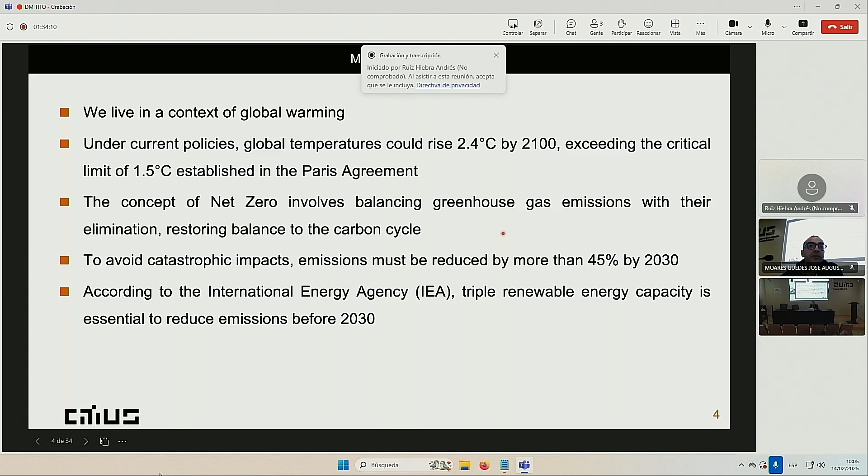So, to mitigate this, the concept of net zero appears, which involves balancing greenhouse gas emissions with their elimination, restoring balance to the carbon cycle. To avoid catastrophic impacts, emissions must be reduced by more than 45% by 2030. And according to the International Energy Agency, tripling renewable energy capacity is essential to reduce emissions before 2030.

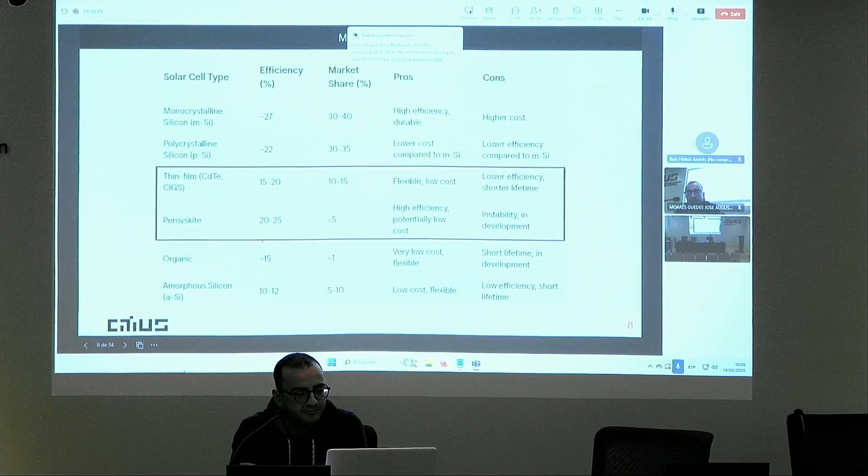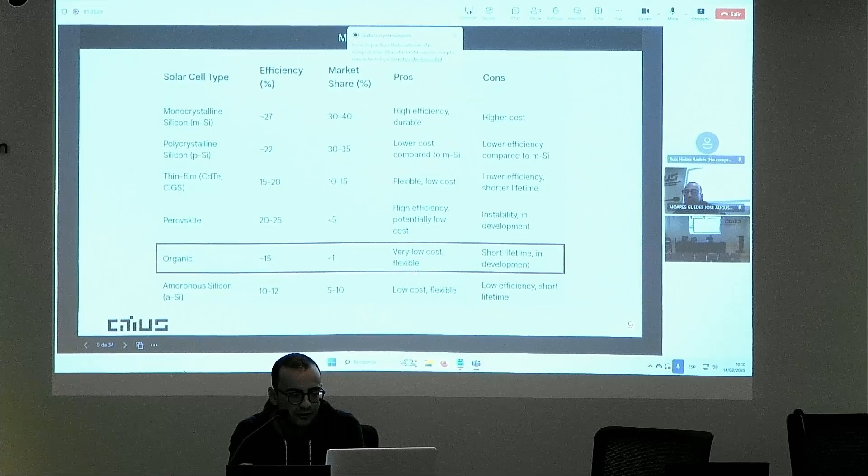However, in this work, we focus on the organic solar cells, which have efficiencies around 15%, which is very low. They have very low cost, and they are flexible.

But why organic cells instead of the other types of cells?

When we compare the organic solar cells with silicon cells, these are presented as a cheap option. They are light and flexible. They are easy to manufacture. There are abundant raw materials, and they are environmentally friendly. In fact, the organic solar cells have the lowest carbon footprint among all.

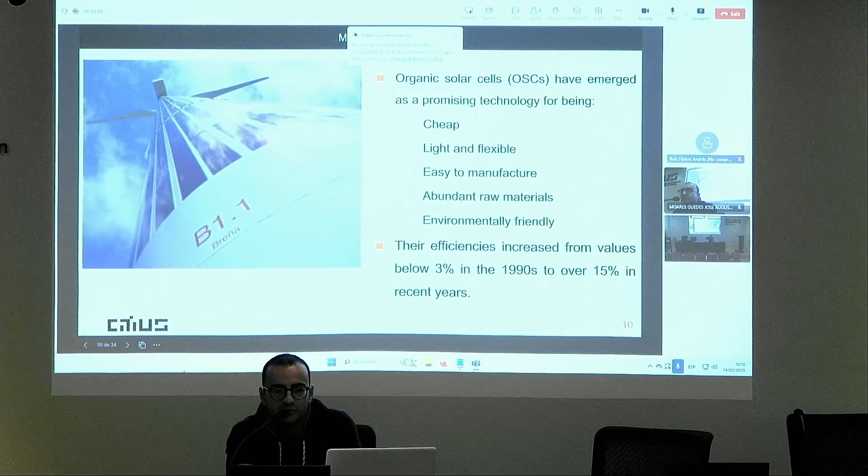Also, their efficiency is increasing, from values below 3% in the 1990s to over 15% in recent years, and rapid improvements suggest that the efficiency is going to keep increasing.

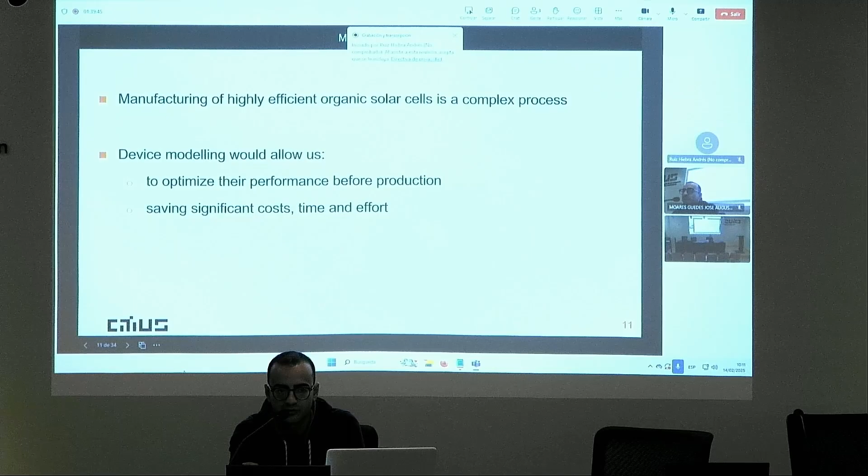When we compare, the manufacture of highly efficient organic solar cells is a complex process. So device modeling will allow us to optimize their performance before production, saving significant cost, time, and effort, which is so important for the industry.

Therefore, in this work, we focus on understanding how an organic and polymeric solar cell works, modeling and characterizing two experimental organic solar cells, and then optimizing the organic solar cell performance to maximize the electrical energy generation.

Let's start with the solar cell fundamentals.

First of all, for a solar cell to work, we need light. The AM1.5G spectrum shown here is the standard for measuring cell efficiency.

Another fundamental concept is the energy band gap, which is the minimum energy to overcome to create the charge carriers, with its relationship to wavelength. For example, if we have a material with an energy band gap of 1.37 electron volts, it means that with wavelengths shorter than around 900 nanometers, we can absorb all these photons and create carriers.

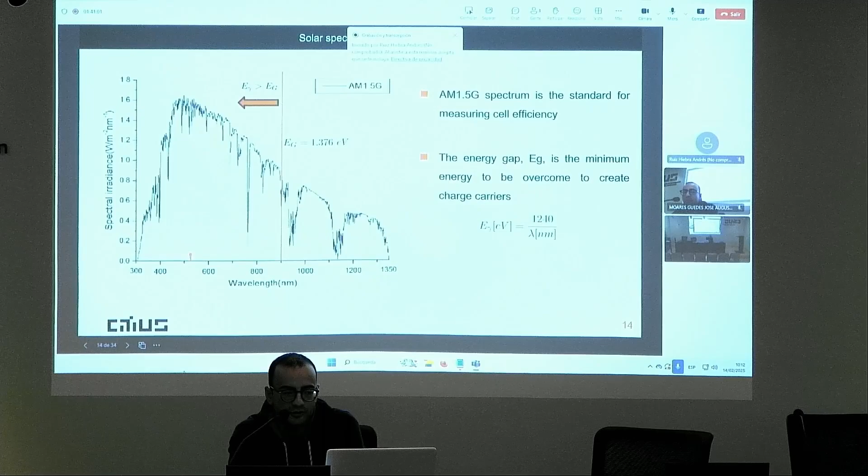After that, the electron must travel to one contact and the hole to the other contact. So the number of carriers created due to the absorption of photons is called the generation rate, and the opposite process is recombination, giving up energy.

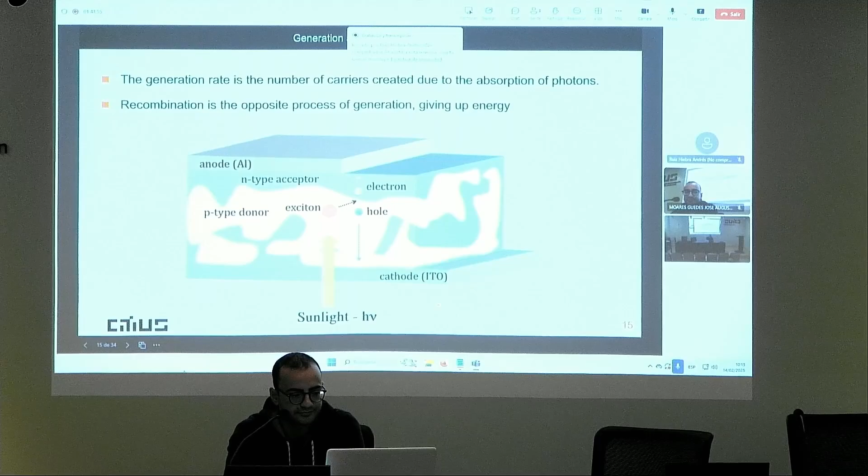Here I present the main figures of merit that we use to characterize the solar cells. Here you can see the current versus voltage curve, called the IV curve, in red. From this curve, we can extract the short circuit current, which is the current at 0 voltage, and the open circuit voltage, which is the voltage at 0 current.

Also, from the power-voltage curve, called the PV curve, here in blue, we can extract the maximum power, and with this point we can extract the voltage and current at this point. With these variables, we can calculate FF, which means fill factor, represented here.

The fill factor graphically is a measure of the squareness of the solar cell. The more square, the better the cell. With all of this data, knowing this and knowing the input power, we can calculate the efficiency of the solar cell.

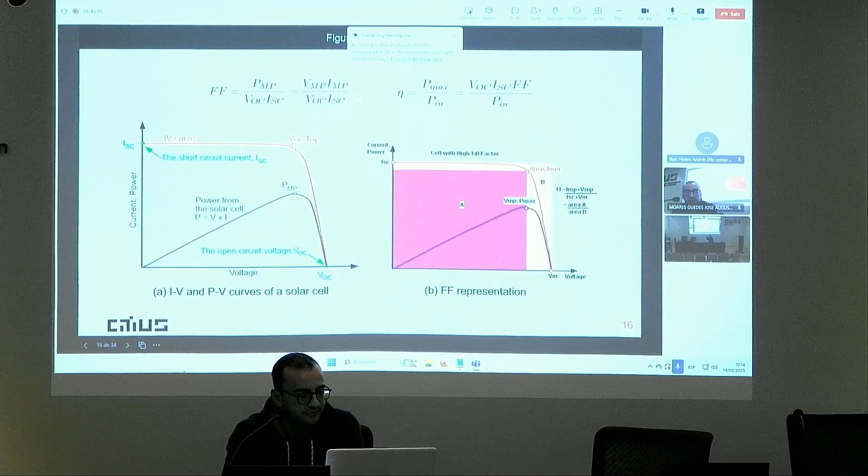Let's move on to the modeling of the experimental organic solar cells.

Among all the types of organic solar cells, we will highlight the bulk heterojunction ones, represented here as an example. These cells are formed by a mixture of two semiconductor polymers.

Here you can see the main structure: first, one transparent electrode made generally from ITO. Then we have the hole transport layer and the electron transport layer, which facilitate the transport of holes and electrons, respectively. Here is the active layer, formed by two semiconductor polymers, and finally the metal contact with a low work function.

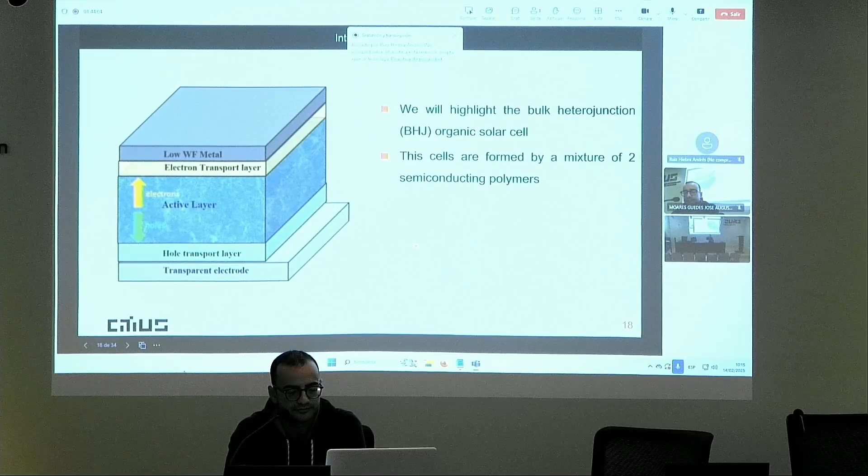This figure illustrates the structure of the experimental organic solar cells fabricated by researchers at Rovira i Virgili University in Tarragona.

Here I present the thickness of each layer. Note that all of them are in the nanometric scale. For example, in the silicon ones, the scale of each layer is around microns.

The structure follows as you can see here. First, the transparent electrode made by ITO. Then we have the PEDOT:PSS and the PDINO acting as the transport layers of holes and electrons, respectively. Here is the metal contact made by silver, and these are the active layers: the first semiconductor as a donor and the second one as an acceptor.

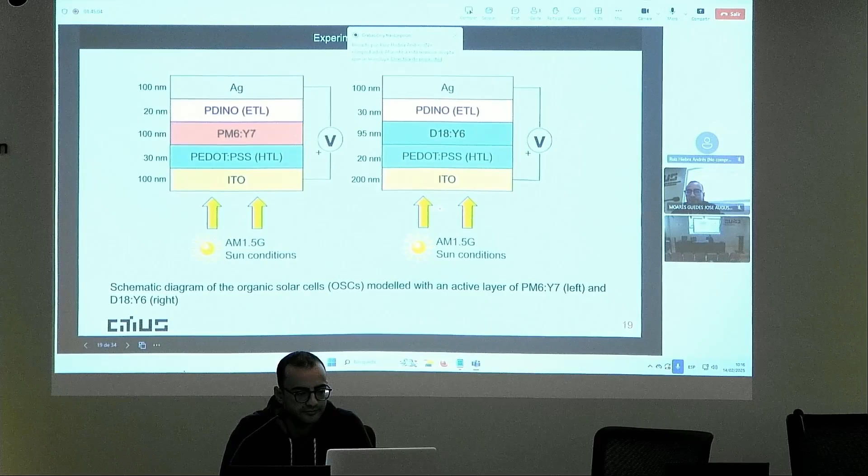In this table, I summarize the key experimental parameters for each organic solar cell. The fixed values in this table are directly taken from experimental works, and the parameters expressed as ranges are not explicitly reported and require fine-tuning.

Here you can see the active layer thicknesses, the work functions of ITO and silver, and the transport layers, the affinity, the relative permittivity, the band gap energy, the lifetimes of electrons and holes respectively, and the mobilities of electrons and holes respectively.

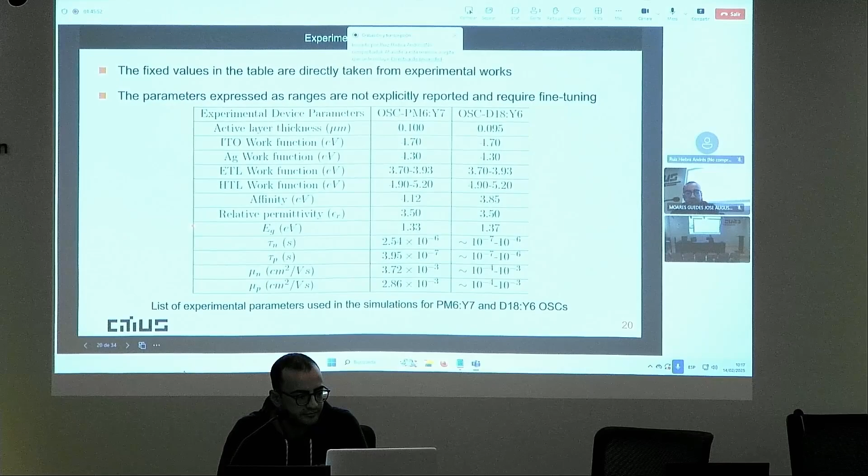To evaluate the photovoltaic performance of the devices, the current density curves were simulated at room temperature. We sweep the voltage from -1 to 1 volt. We simulate at dark conditions, meaning without illumination, and under the AM 1.5G solar spectrum, with light intensity of 100 milliwatts per square centimeter.

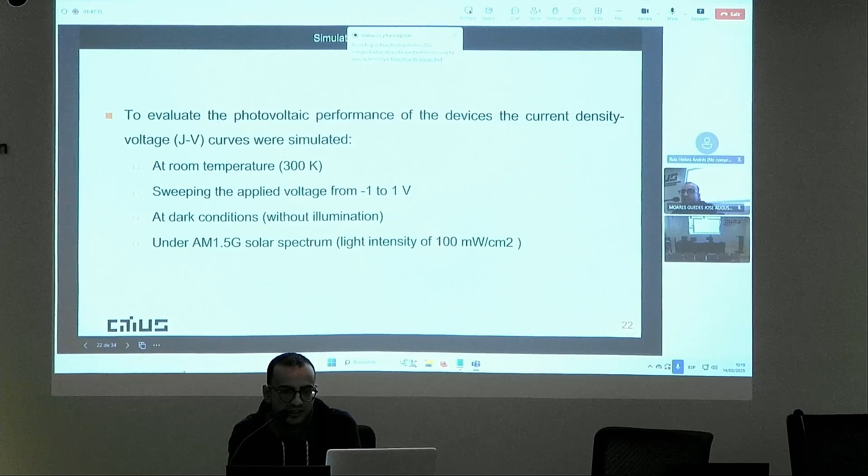Now let's see the results. This figure shows a comparison between the experimental and the calibrated curves of the PM6 organic solar cell under both illuminated and dark conditions. Note that the simulated curves perfectly match the experimental ones, validating the accuracy of our modeling.

Similarly, in this case, from the D18 organic solar cell, we have the same behavior. Both calibrated and experimental curves perfectly match, validating the accuracy of our modeling.

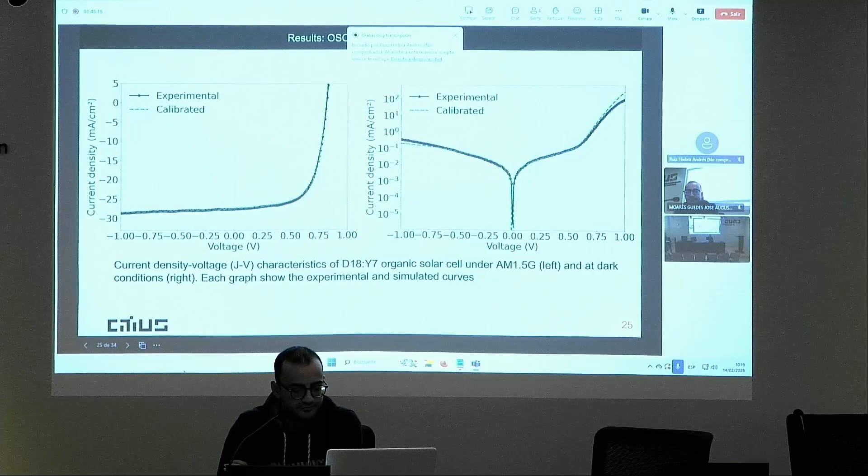One of the main objectives of my work is to optimize the devices. Now that we have calibrated our cells, we can reproduce them even when we change these properties, so we can start to optimize.

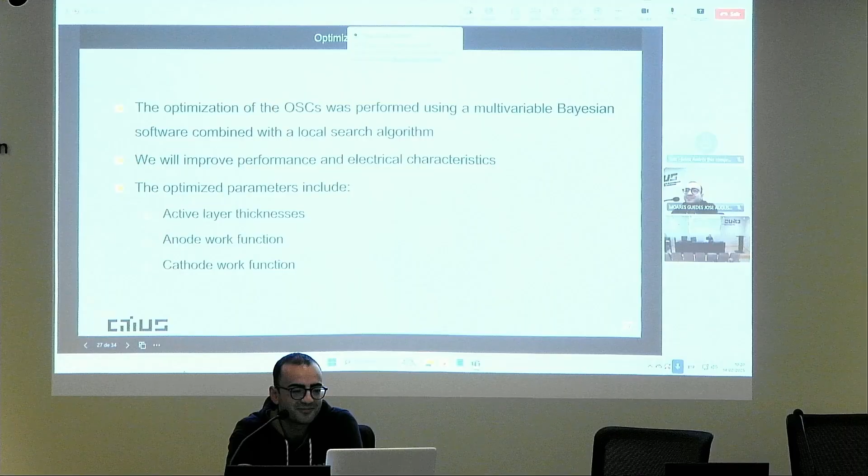The optimization of the organic solar cells was performed using a multivariable Bayesian software combined with a local search algorithm. We will improve performance and electrical characteristics, and the optimized parameters are the active layer thickness and the work functions of the anode and the cathode.

Here you can see the graphical results. These figures compare the optimized, calibrated, and experimental curves under illumination. This is the figure from the PM6 organic solar cell, and this from the D18 organic solar cell. As you can see, the optimized devices show an improvement in performance compared to the experimental and calibrated ones, especially in the case of the PM6 organic solar cell.

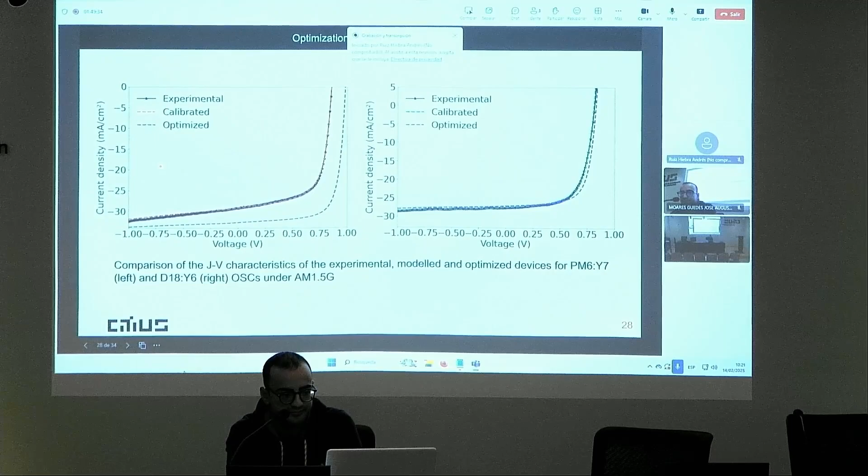Here in these tables I present the numerical results. The first table shows a comparison between the experimental and optimized design parameters for the active layer thickness and the work functions of the anode and the cathode. As you can see, the anode work function was increased to 5.8 electron volts, and the cathode work function was reduced to 3.5 electron volts.

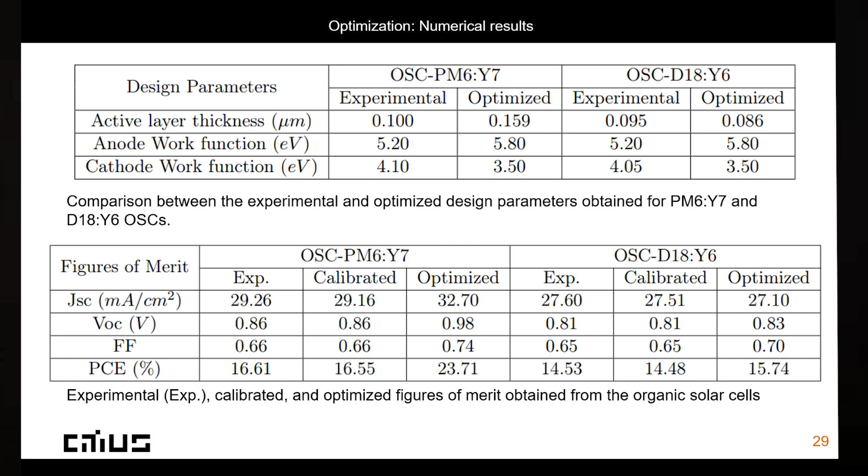This could improve the open circuit voltage and the fill factor, as you can see in the second table, for each organic solar cell. Also, the active layer thickness was modified for each organic solar cell. In the first case, this thickness was increased from 0.1 microns to 0.159 microns.

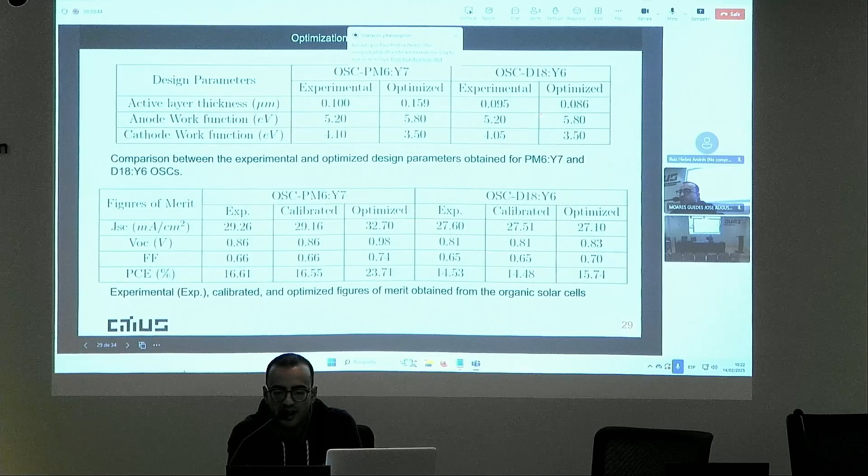This improved the short circuit current in this organic solar cell. In the second one, the active layer thickness was reduced slightly, and this improves the fill factor. And finally, with all this data, you can see the improvements in the efficiency.

For the first organic solar cell, I can improve from 16.5% to 23.7%, which is an increase of 7% efficiency, which is a lot. And for the second one, we increased the efficiency from 14.5 approximately to 15.7.

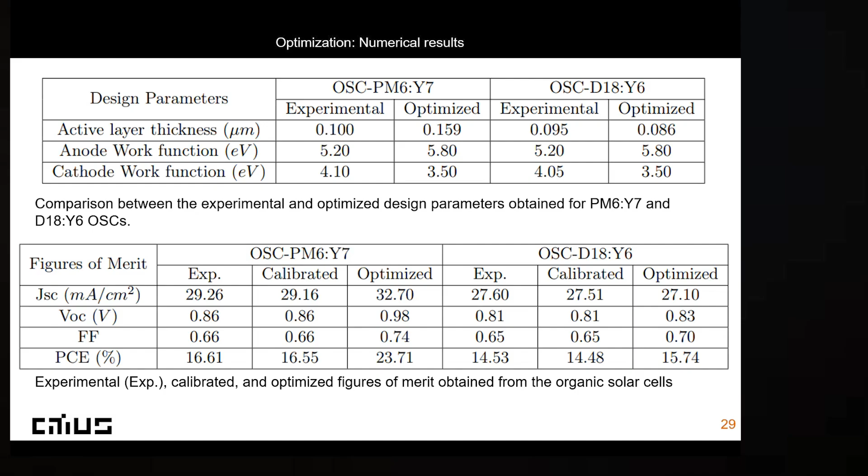This means that the manufacturers at the Rovira i Virgili University manufacture this cell much better than the first one, because when we optimize these cells, we can achieve a big difference between the calibrated and the optimized, but here not. So this cell is well fabricated.

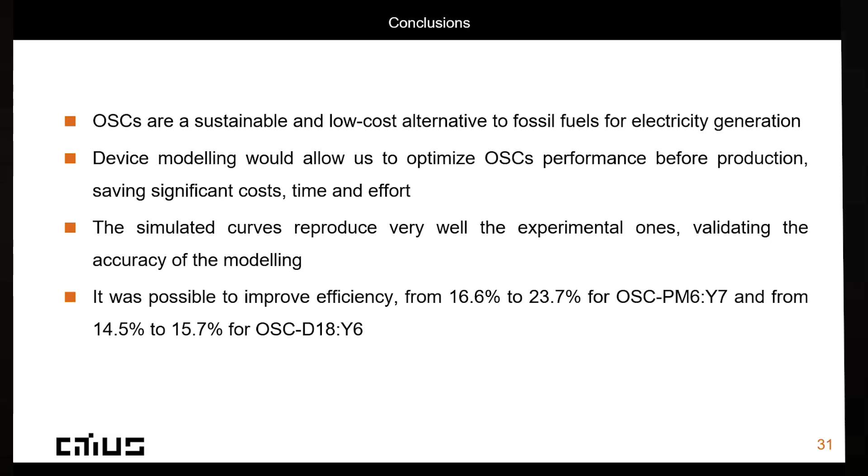And finally, some conclusions. The organic solar cells are a sustainable and low-cost alternative to fossil fuels for electricity generation. Device modeling will allow us to optimize the organic solar cell performance before production, saving significant cost, saving time, and saving effort. Also, the simulated curves reproduce very well the experimental ones, validating the accuracy of our modeling.

And finally, it was possible to improve the efficiency, increasing by more than 7% for the first organic solar cell and only 1% in the second one.

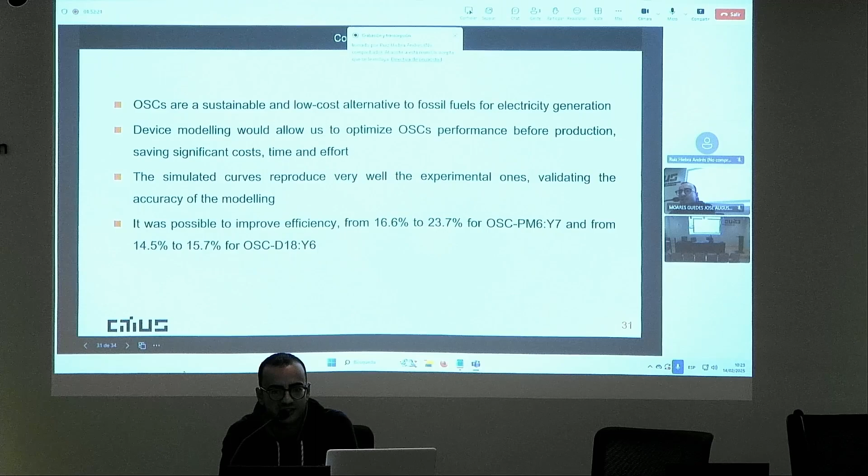And thanks for your attention.

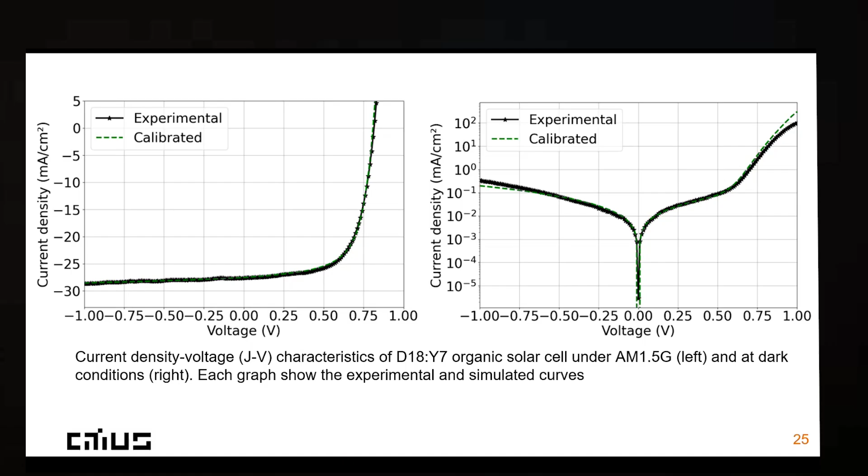Now, you said that you are considering the shunt resistance in your modeling, but not the series resistance. Typically, the series resistance is the parameter that affects the most in the current technology for all photovoltaics. So I was wondering why is that so? I know shunt resistance can be very important, but why not consider series resistance in this case?

In our case, our collaborators at the Rovira i Virgili University provided us that information. So the series resistance was around 0.9 ohms, so it's such a low value, and the shunt resistance was not.

So because of the actual size of these cells? Of these cells, yeah, not the active layer, the illumination area.

Our collaborators made cells around only 1 square centimeter approximately. I don't know about the fingers. Yeah, so the cell is very small, so yes.

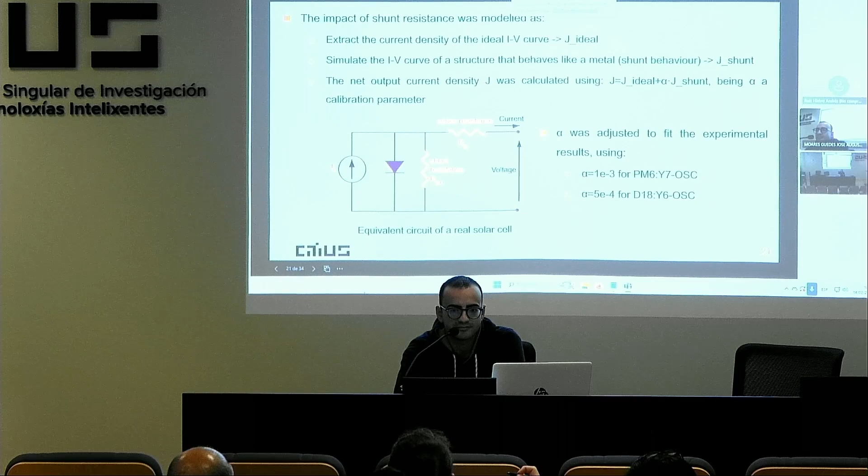But if this technology is made for printing big layers of organic material, if I'm correct, in that case, will series resistance be an issue in bigger cells?

Due to shadowing, yes. In these cases, since all types of organic solar cells are still in development, there isn't an explicit magic value to optimize the performance by introducing fingers or contacts. So, well, it's a field that we can research.

Yeah, because the contact is an ITO. Yes, so it's fully covered on the ITO. So you probably don't have problems with series resistance because of that. It's transparent. Yeah, it's transparent. So maybe you don't have problems with series resistance because of that. Yeah, yeah, okay, thank you.

Is there any other question? In other countries, thank you very much for your nice presentation. In other countries, if you don't ask questions it means you are sleeping during the presentation, or doing other things, they prefer to ask.

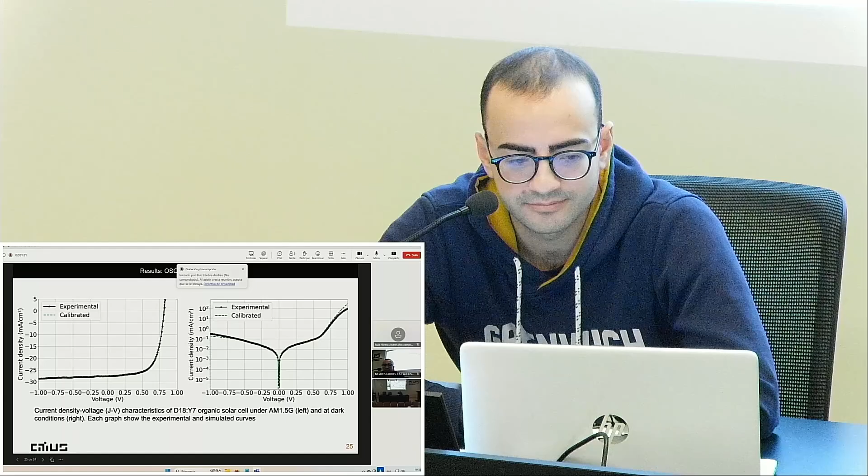You also change some anode and cathode work functions, but it seems the active layer is the most important. Why is that? So you improve the current. Yes. Why? Because when they manufacture this solar cell, they aren't absorbing all the photons that the active layer can absorb. For example, in the experimental case, they are not absorbing all the possible photons, so increasing it by only 15 nanometers more, you can absorb all those photons, improving the short circuit current and then the efficiency.

And why does the active layer shrink for the other polymer? Do you have any sense of that? Yes, we thought that in this case, with these thicknesses, this cell has recombinations, so it's related to the lifetimes and mobility. Yeah, I think a little bit more physical discussion of those parameters would be interesting. Okay, thanks.